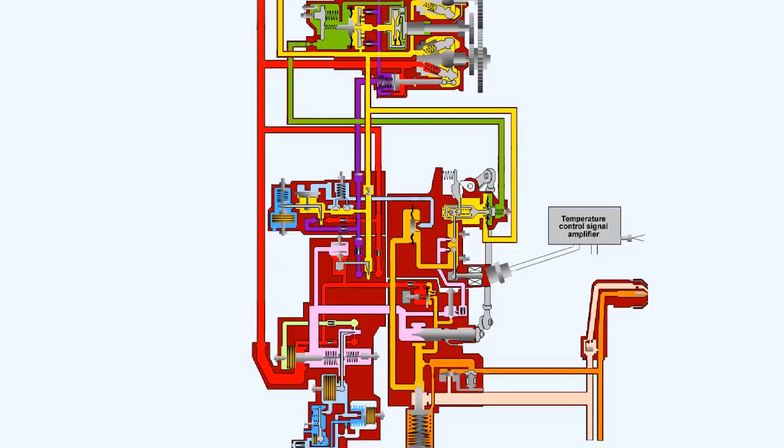Variations in air intake, or P1 pressure, require that the fuel flow to the burners is adjusted so that a fixed RPM is maintained for a selected throttle position at all altitudes and airspeeds. This is achieved by the expansion or contraction of a capsule influenced by P1 pressure, which in turn modifies the fuel flow to suit the new conditions. This capsule, known as the barometric pressure capsule, is incorporated in an altitude sensing unit within the fuel control unit.

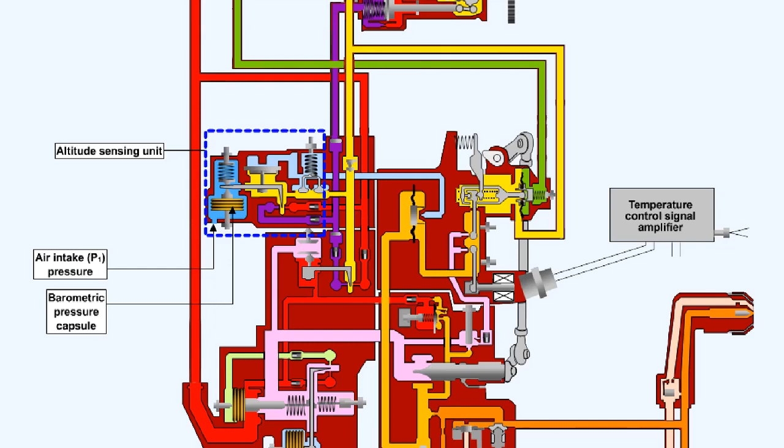It's necessary to increase the fuel flow to the engine to make it accelerate. However, too rapid an increase of fuel flow into the engine can cause compressor stall and surge. To regulate the fuel flow under conditions of engine acceleration, an acceleration control unit is fitted within the fuel control unit. The acceleration control unit receives information regarding engine intake pressure, P1, and compressor delivery pressure, P3 for a two-spool engine, and uses this information to adjust a fuel metering plunger. The fuel metering plunger effectively acts as a second throttle valve in series with the main throttle, and it regulates the fuel flow to achieve the fastest engine acceleration without causing stall or surge.

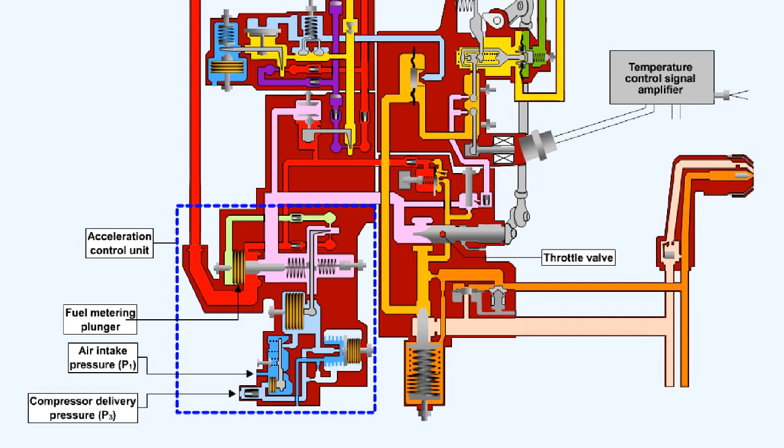Exhaust gas temperature is probably the most important parameter in a gas turbine engine. To obtain maximum efficiency, the engine must be run at the highest possible temperature in the turbine without melting the materials from which it's made.

To achieve these conditions and yet still allow the engine to be a practical, user-friendly unit, automatic monitoring of the exhaust gas temperature is combined with a top temperature control unit. The top temperature control facility allows the pilot to select full power at any time without risking a meltdown in the turbine assembly.

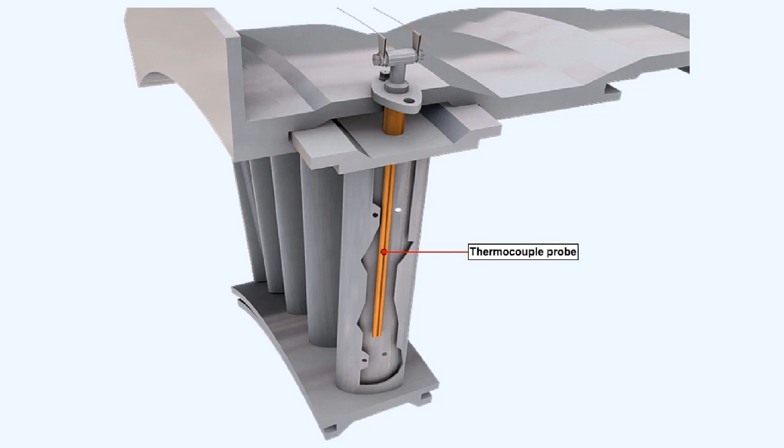Thermocouple probes are positioned in the gas stream, either within the turbine assembly or close after it. The output of these thermocouples is used to measure the temperature at the rear of the engine. This output is passed both to the cockpit instrumentation and to a temperature control signal amplifier. The electrical output of this amplifier drives the solenoid, which indirectly controls the fuel flow to the engine.

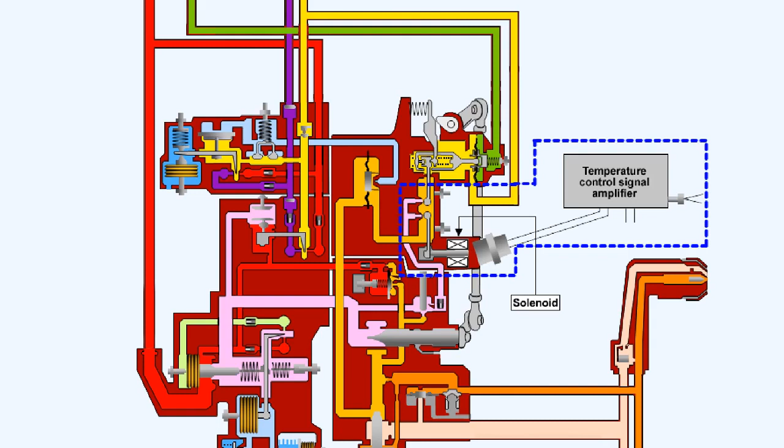The ability of the compressor to withstand internal pressure is limited by the strength of the materials from which its casing is made. If the compressor casing is subjected to pressures greater than its design maximum, it will break, with probably catastrophic consequences.

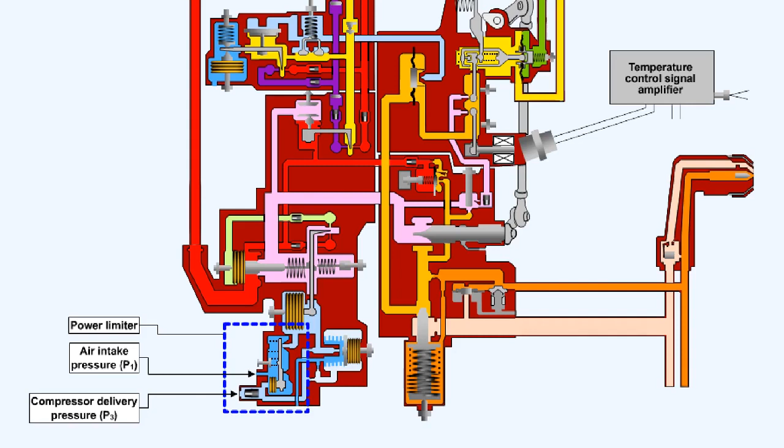To prevent compressor casing failure, the fuel control unit incorporates a power limiter device. The power limiter receives signals of both intake pressure, P1, and compressor delivery pressure, P3. The ratio of P3 pressure to P1 pressure can be found by combining these signals. A system of capsules and levers controls the fuel flow to the engine so that a maximum pressure ratio is never exceeded, and thus the integrity of the compressor casing is retained.

If excessive centrifugal force is to be prevented from destroying the compressor spools, their maximum rotational speeds must be limited. There are basically two methods of achieving this compressor rotational speed limitation.

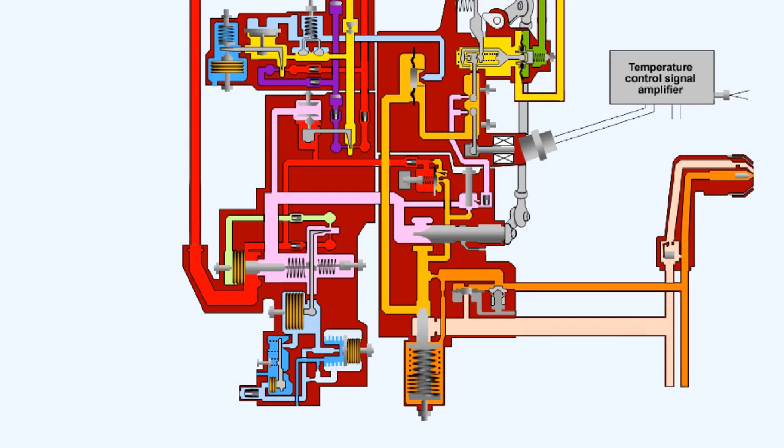The first method of controlling the rotational speed of a compressor, usually the low-pressure compressor, depends on an electrical signal proportional to the speed of the compressor shaft. A tachogenerator or electronic speed sensor, which is driven by the appropriate shaft, sends signals to an amplifier. If the output of the tachogenerator approaches a predetermined maximum level, the fuel flow will be adjusted to prevent the maximum RPM being exceeded.

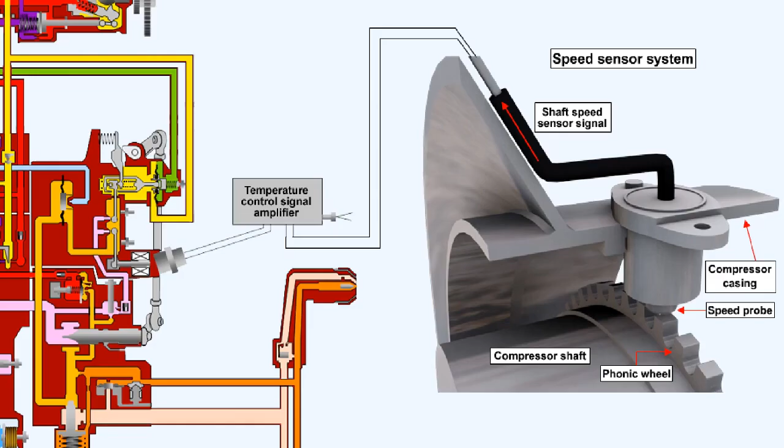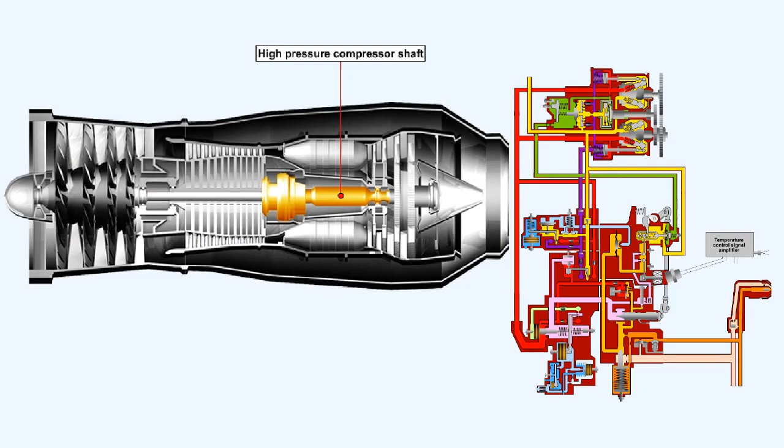The second method of controlling the rotational speed of a compressor is normally used to control the speed of rotation of the high-pressure compressor shaft. This high-pressure compressor shaft drives the accessory gearbox, which in turn drives, among other things, the high-pressure fuel pumps. Fitted within the high-pressure fuel pump is a hydromechanical governor. The hydromechanical governor uses hydraulic pressure as its controlling parameter. The hydraulic pressure, which is generated inside the pump by the rotation of the moving parts, is proportional to engine speed.

As engine speed, and thus hydraulic pressure, builds, it acts on a diaphragm. Movement of the diaphragm opens valves which bleed off some of the servo piston pressure, which reduces the high-pressure fuel pump cam plate angle. This reduces the high-pressure fuel pump output and attenuates the fuel flow to the burners.

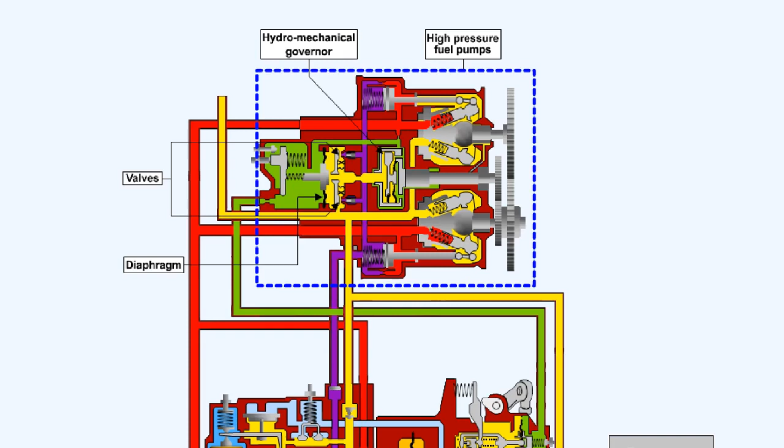The high-pressure fuel cock, sometimes called the high-pressure fuel shutoff valve, controls the flow of fuel between the fuel control unit and the fuel spray nozzles in the combustion chambers. It is the control normally used for starting or stopping the fuel supply to the engine. It may be mechanically controlled by a lever on the flight deck, or electrically controlled by an actuator, which is also controlled by a switch on the flight deck.

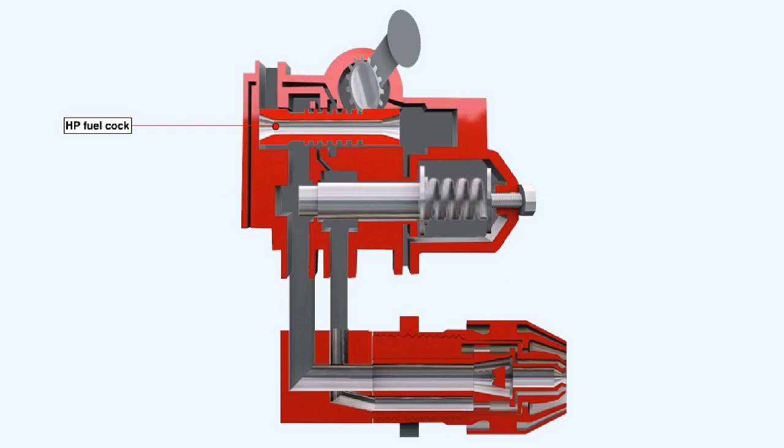When the engine is shut down, any fuel remaining in the fuel manifold would tend to boil as a result of residual engine heat. Solid deposits resulting from the boiling will clog the fuel lines into the system, which would be detrimental to the operation of the engine. The dual inlet line fuel spray nozzle system can utilize a pressurizing and dump valve to prevent this happening.

When the engine is shut down, fuel pressure generated by the opening of the high-pressure fuel cock, which was holding the dump valve closed, is lost. The spring inside the dump valve will now be able to open the valve and allow the contents of the fuel manifold to pass back to the supply line. At the same time, the inlet check valve will close, maintaining fuel inside the unit ready for the next start.

When the high-pressure fuel cock is opened, a signal of fuel pressure is sent to the dump valve, which moves over and shuts off the fuel flow back to the supply line. In moving over, the valve also opens the passageway to the primary manifold. Fuel pressure from the fuel control unit will open the inlet check valve and pass through the filter to the primary fuel manifold.

At a predetermined engine speed, the fuel pressure from the fuel control unit will build sufficiently to open the pressurizing valve, and fuel will also begin to flow into the main manifold, expanding the fuel spray pattern and assisting in better atomization.

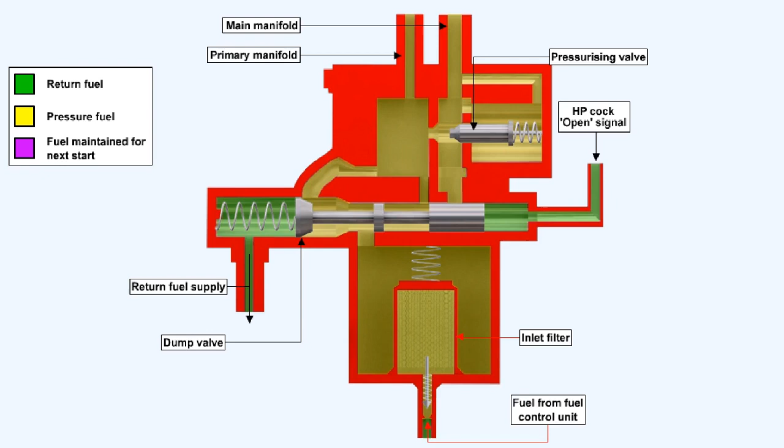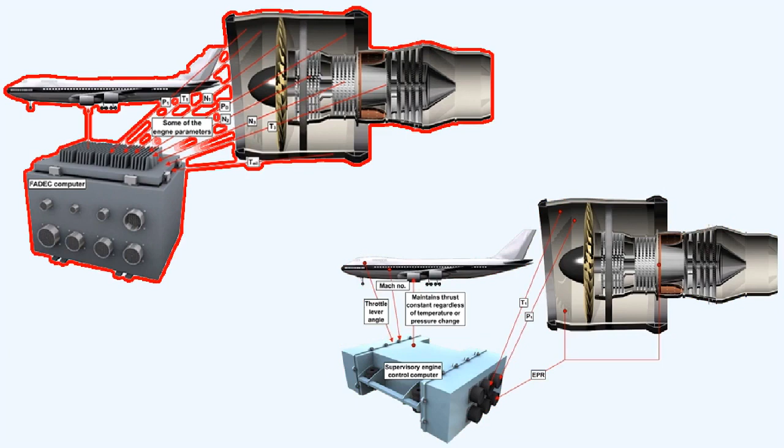Many modern gas turbine engine installations utilize electronic engine control to enable better fuel economy, better reliability, and prolonged engine life. Two types of electronic engine control are currently in use: the supervisory engine control system, and the full authority digital engine control system.

The supervisory engine control system uses a computer which receives inputs of various engine operating parameters and controls a standard hydromechanical fuel control unit. The fuel control unit responds to the electronic engine control commands and performs the functions necessary for engine operation and protection.

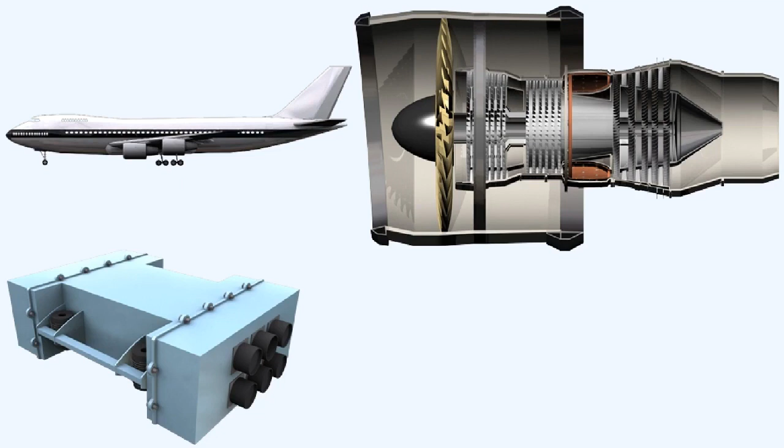The computer will monitor EPR, throttle lever angle, Mach number, engine intake pressure, and temperature, and will maintain a constant thrust regardless of changes in air pressure, temperature, or flight environment. Any fault with the electronic engine control will cause the system to revert to manual control.

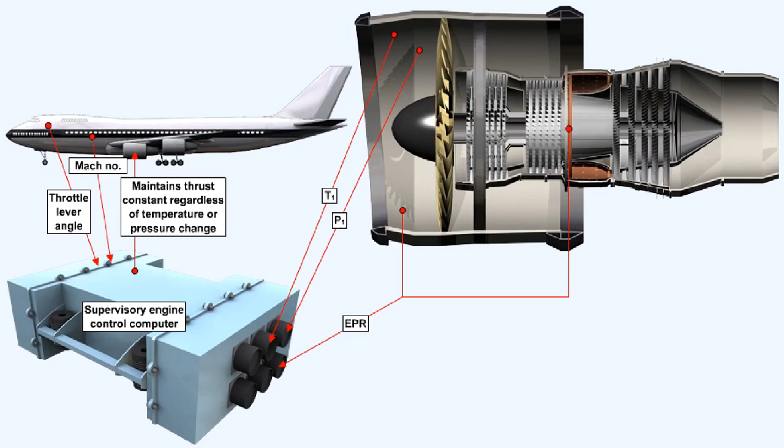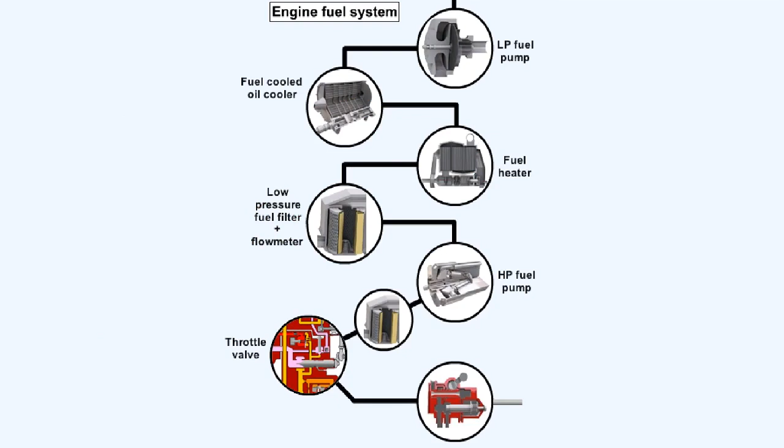The full authority digital engine control system, commonly called by its initial letters FADEC, receives all the necessary data for engine operation and takes over virtually all of the steady state and transient control functions, which includes compressor airflow control. The hydromechanical fuel control unit is now redundant, except for the throttle valve and fuel shutoff cock, which reduces the mechanical complexity of the engine fuel system.

The FADEC system will monitor all of the normal engine parameters and prevent limitations being exceeded while controlling the engine through all modes of operation, for example starting, idle, acceleration and deceleration, takeoff, climb and cruise. In other words, it controls the engine in response to the throttle lever position or the flight management computer thrust demand.

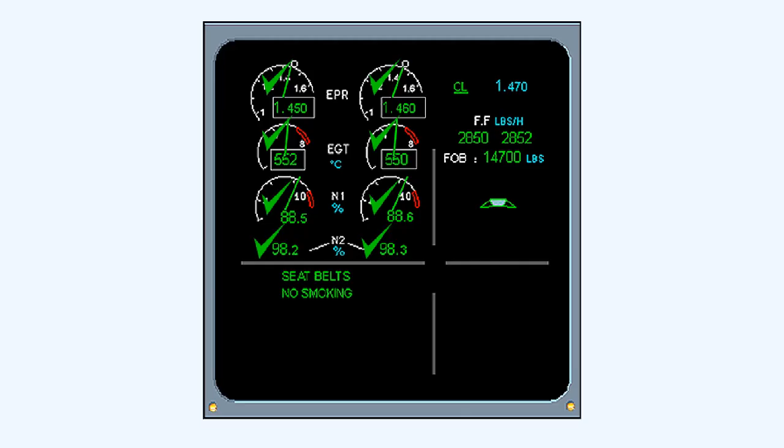The digital computer which is required to run the system has to be considered an essential component of the engine, just as essential as the compressor or the turbine. This is because a complete failure of the FADEC system would cause the complete loss of the engine thrust.

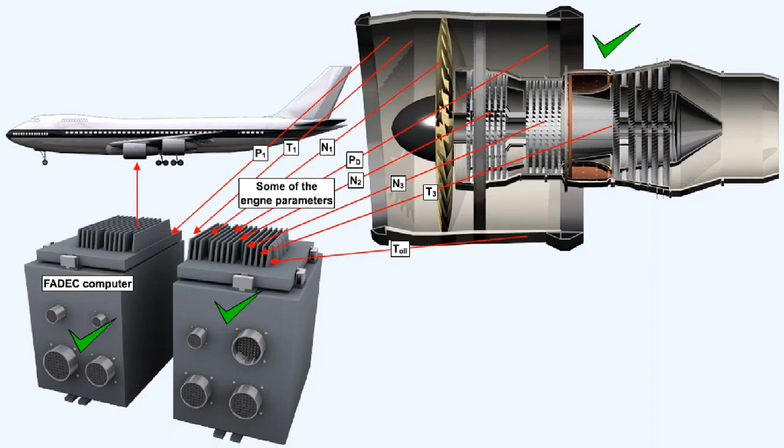To minimize the chances of a single failure causing the loss of an engine, the FADEC system incorporates two separate identical digital channels. Each channel is able to provide information to enable all engine functions. The FADEC system can be powered from the aircraft electrical system, but in most modern aircraft the system is driven by a separate generator fitted to the accessory gearbox of the related engine.

This concludes the lesson on engine fuel systems.